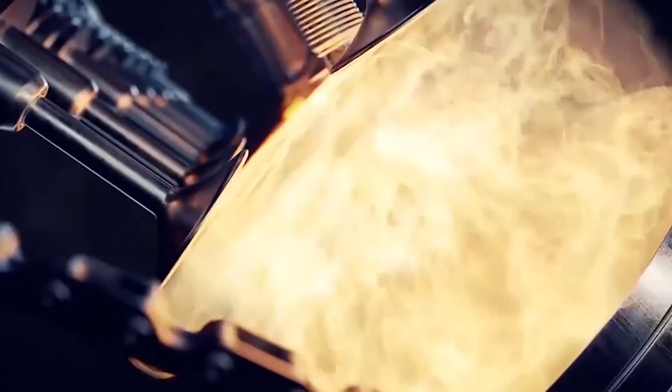Fuel, oil and lubricants, and their effects on combustion engines. Every time an engine is run, deposits are left behind, and these always have a long-term effect on the way the engine functions and its degree of efficiency.

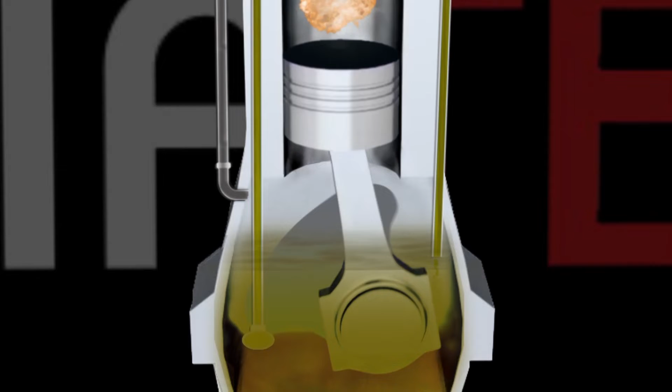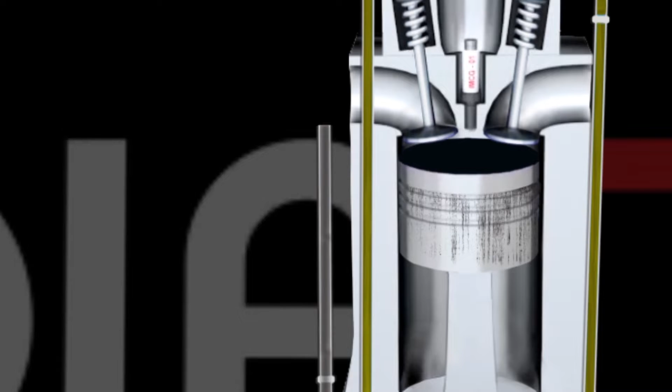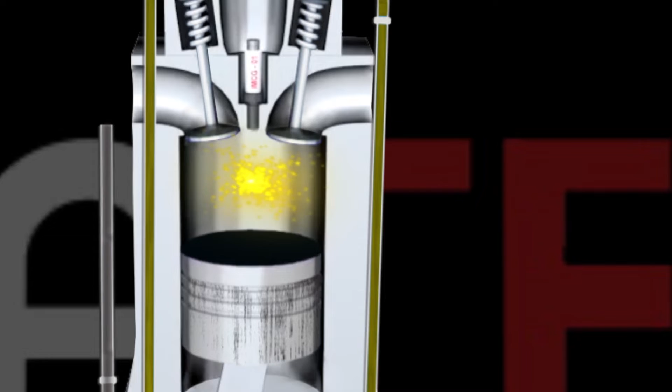In particular, compression is reduced as a result of sediment in the area of the piston rings, oil rings, and their grooves. The deterioration in the combustion of the fuel-air mixture resulting from this leads to a reduction in the engine's performance. As a result of this, there is an increase in both oil and fuel consumption.

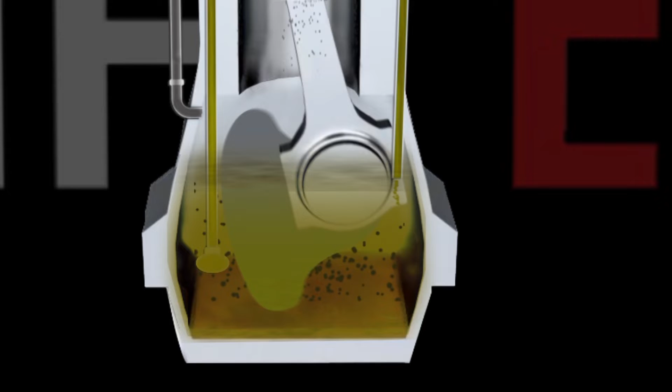This creates a situation where the sediment caused by the combustion process increases markedly, exhaust fume levels rise, and not least, the wear and tear on engine parts escalates. Parts of the mixture and combustion gases evaporate in the crankcase and thereby accelerate the speed at which the quality of the oil deteriorates. And this can lead to problems in the crankcase breather system.

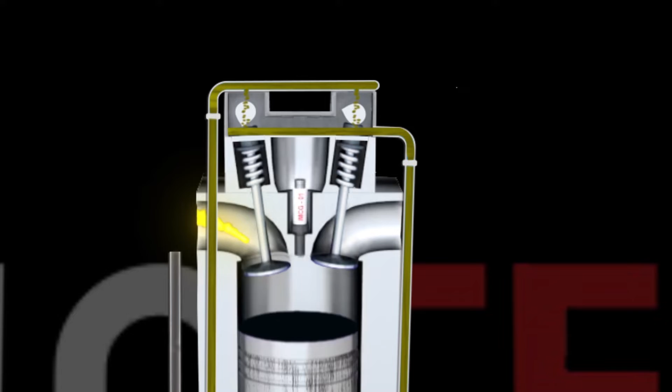Larger particles of dirt, such as the formation of resin deposits in the oil ducts, can trigger a reduction in the lubrication of important components, for example, the camshaft. Are all these impurities removed by a normal oil change? To illustrate this, let us have another look inside the crankcase.

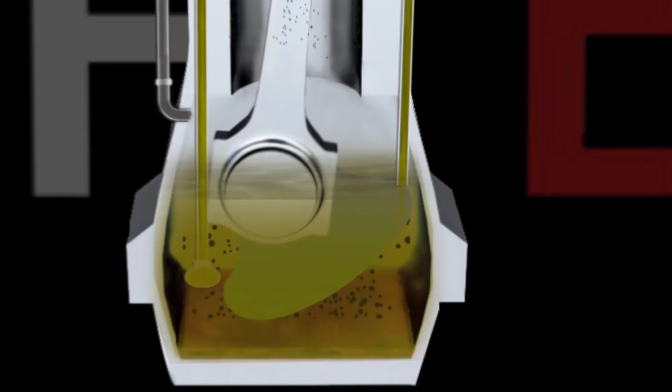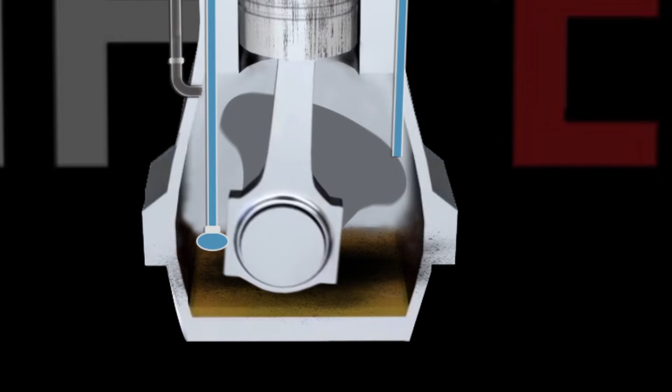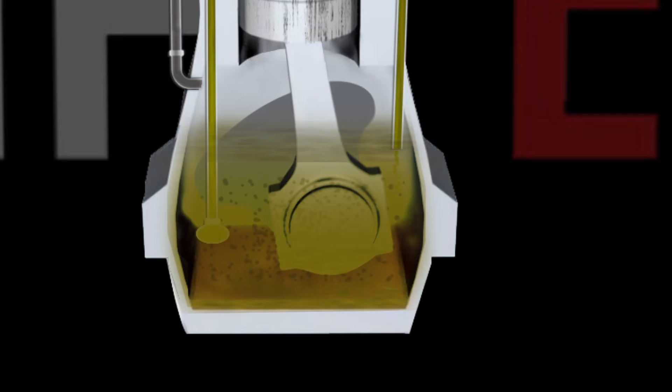The old oil is drained during the simple oil change process. However, not all the impurities caused by running the engine are removed when the old oil is drained off. Some of them remain in the form of deposits in the oil and the lubrication system. Once the engine has been refilled with fresh, clean oil and is then started, the new oil absorbs the remaining deposits, and in a very short time, the oil is once again contaminated. This situation naturally has a negative effect on the efficiency of the new oil.

In order to maintain both the performance and the economic efficiency of combustion engines, we recommend that the complete oil and lubrication system is cleaned before each oil change. After our cleaning agent has been added to the old oil, the engine is run in idling mode for 10 to 15 minutes. During this time, it releases all the impurities caused by running operations in very fine molecules, as shown here at individual problem zones.

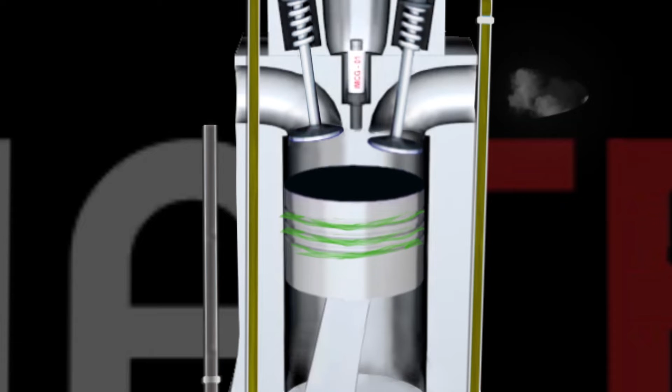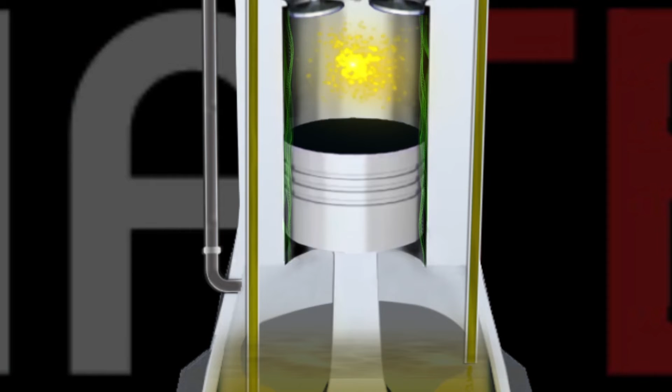In our example, this is the piston ring area, the crankcase breather area, the camshaft lubrication area. At the same time, highly efficient lubricating substances protect the engine during the whole cleaning process. Elastomers, such as oil seal rings and O-rings, are kept absolutely supple.

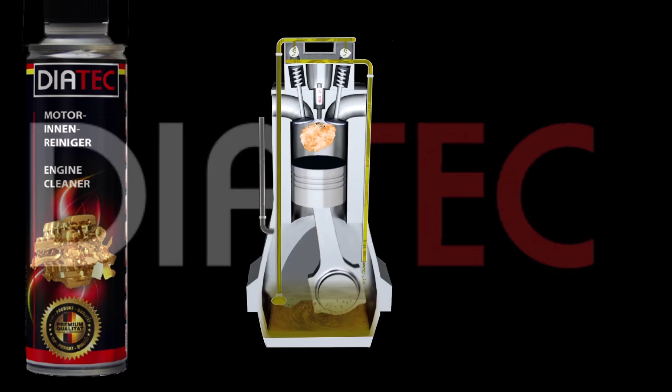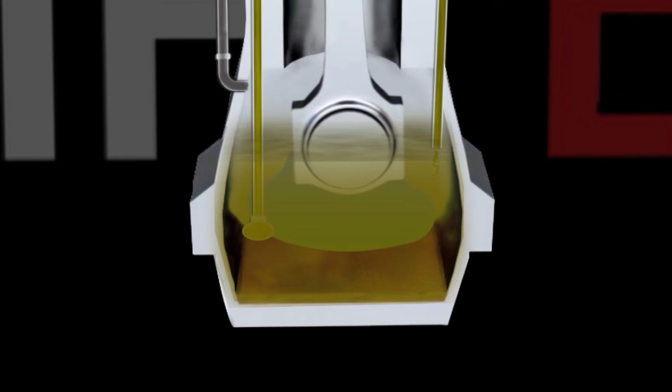All the impurities are now removed when the old oil is drained. This means that the oil and the lubrication system, which we fill with new fresh oil, are kept very clean. Now, the new oil can perform to the best of its ability in a clean environment and fulfill the tasks required of it, such as lubricating, sealing, cooling, purifying, and keeping particles in suspension.

The fresh oil is now able to absorb the impurities that have been newly created and is no longer limited in its ability to perform by the old deposits. As a result, we have new, fresh oil in a clean engine, the best possible oil and fuel consumption, improved engine performance, less wear and tear on parts, the lowest exhaust emissions, and a longer life for the catalytic converter.